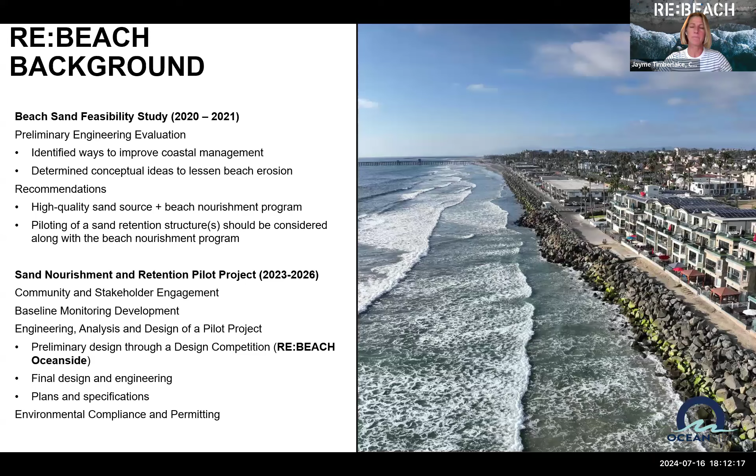Want to hit the next slide, Nick?

So last summer, as you may remember, Oceanside hosted the ReBeach Oceanside International Design Competition, which gave the city an opportunity to see what kinds of beach erosion solutions were already being tested in the world that we could borrow from other communities dealing with similar coastal stressors. The finalists included competitors from New York City, the Netherlands, and the Gold Coast of Australia.

The competitors were given parameters for the competition that were completely in line with the recommendations from the feasibility study. That was to design a sand retention feature that would restore and maintain sand along the coast while providing additional benefits to the community, and increase the efficiency and extend the benefits of any sand nourishment efforts that the city, region, or federal government may carry forward.

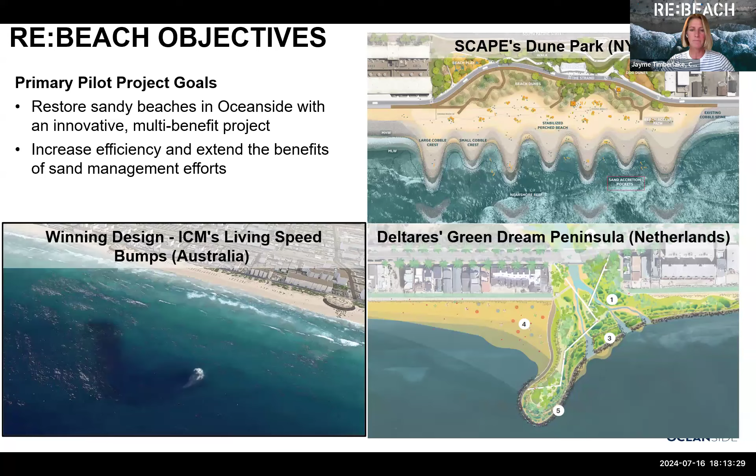We did a lot of public outreach for this, so we feel good heading into this next round. The competition finalists took part in 3 design rounds, each culminating with a presentation to the public at an in-person workshop. These rounds gave the public an opportunity to give feedback directly to the design competitors, and that feedback was incorporated into the final designs. All of these workshops were very well attended, with 150 to 220 people participating at each.

It's really important to recognize that you've been a part of this for a long time. We've been reaching out to you for a long time. Please continue to stay involved. Your involvement is really key to the success of this project, and I thank you very much.

There's also been a lot of regional interest. Given that interest and the potential effect of this implemented project at various scales, the project team has shared updates with regional stakeholders throughout the ReBeach process. Informational presentations have been given to city councils or designated commissions for all the cities to the south of us, including Carlsbad, Encinitas, Solana Beach, and Del Mar. Additional regional outreach has also been conducted at a myriad of local and regional stakeholder meetings and events, some of which are listed here.

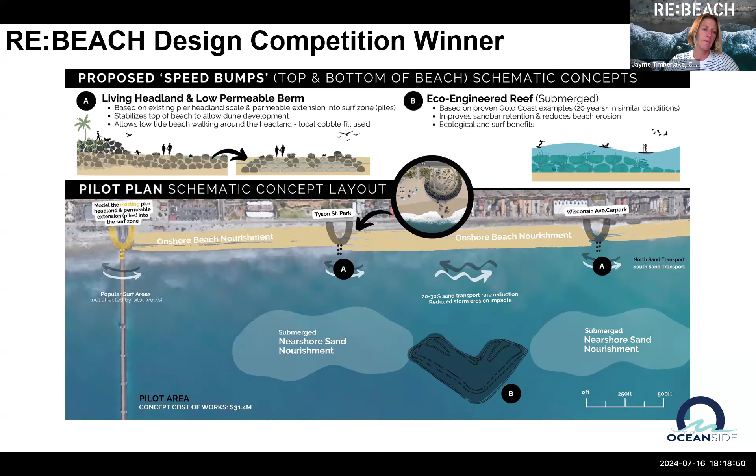Thanks, Jayme. Confirming that you guys can hear me okay. Good evening, everybody. My name is Nick Sadripour, senior coastal scientist with GHD, the consultants to the city and leading Rebeach. We're really excited to talk to you tonight about the siting analysis and orient you to how we're approaching the methodology and how we're looking at choosing a potential location for the pilot project.

For some of you who participated through the council workshop in January, you might remember we broke down the area, largely south of Oceanside Pier, into these 3 segments that were identified using natural breaks in the coastline, major roadways, natural coastal features, public access ways, along with the existing coastal management considerations. That's how we landed at these 3 segments.

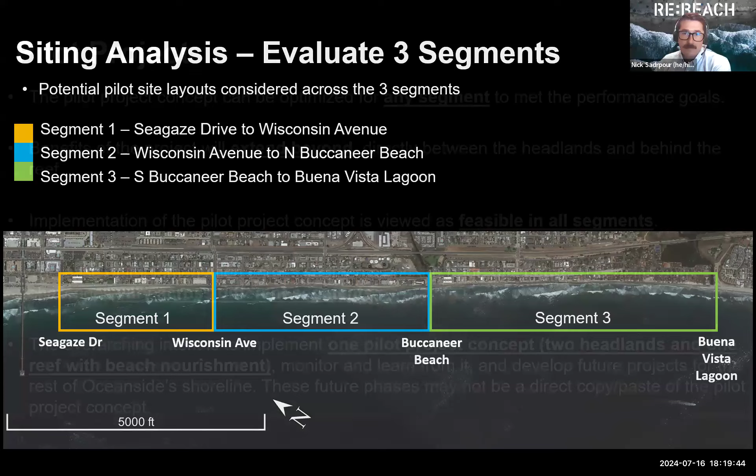Tonight, I'm going to walk through how we're viewing the pilot project concept in these segments. First, I'll go through the overall methodology and the criteria, then we'll pause for some Q&A, and then we'll go into the potential layouts in individual segments in more detail.

To orient you to some assumptions and how we're framing this siting analysis: we view that the pilot project concept can be optimized for any of the segments to meet the anticipated performance goals of the project. We also view that the benefits of the pilot project will extend beyond that specific location, meaning if a project is installed in one location, we anticipate the benefits to be much broader due to not only the stabilization we're hoping to provide, but also the beach nourishment component bringing new sand supply to this coastline and adjacent shorelines.

That being said, we view implementation of the pilot project concept as feasible in all the segments. However, the ease of implementation across the segments and the trade-offs between the benefits and challenges of implementation are going to vary across the different segments.

So overall tonight, our larger project goal and intent is to try to implement one pilot project concept, which is, as Jayme mentioned, the 2 headlands with 1 reef and beach nourishment, to monitor and learn from that pilot concept, develop future projects for the rest of Oceanside shoreline after we have this pilot project, and then understand its performance, what management's needed, and design additional strategies as needed.

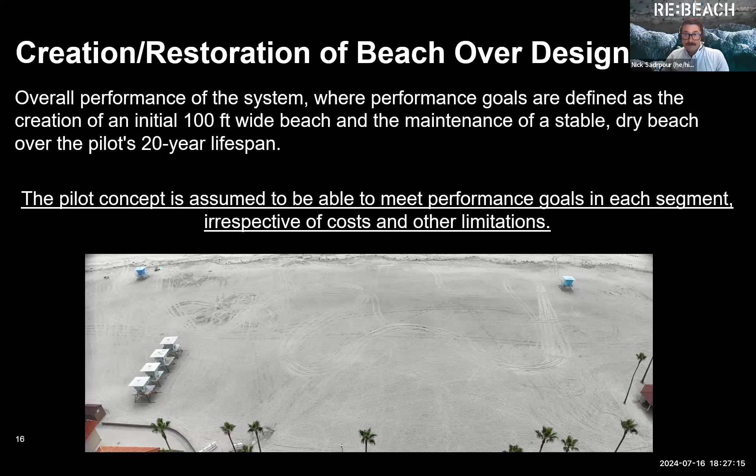The next criteria is sediment supply to adjacent beaches. This criteria assesses the anticipated long-term sediment supply response, an increase or decrease of the project outside of the immediate pilot project extent. Importantly, this includes beach nourishment management strategies.

We anticipate this strategy to result in an increase of sediment supply in the region because we're bringing a lot of new sand to the area, and that there's monitoring and management strategies established to mitigate any detrimental sediment supply effects. Similar to the other criteria, we assume this to be equal across the segments, meaning we can achieve the same level of positive benefit to the region regardless of the segment.

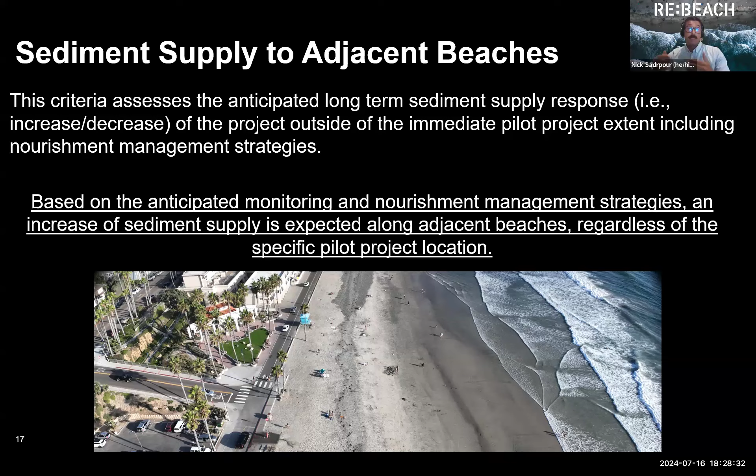Now, you might be asking why did we choose these criteria if we expect them to be equal? We felt that these two are some of the most important criteria when evaluating this project, the performance and the sediment supply, and that it's worthwhile to include them in this analysis even if we anticipate them being equal across potential locations.

All right, coastal access and amenities. This criteria looks at existing public features, access ways, parking lots, lifeguard facilities, parks, open space, restrooms, showers, things that provide additional amenity at that beach to a user group.

Given the diversity of amenities, some locations are better supported by certain amenities than other locations, and the location and type of public amenity can really help us think about how the pilot project location might be able to leverage those features in a particular location.

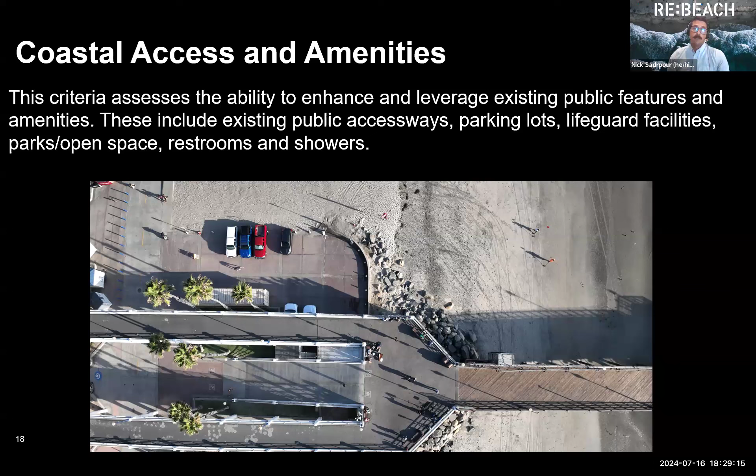The next criteria is property risk assessment. This criteria looks to account for risks and uncertainties associated with the pilot project. The uncertainty of effects is due to the experimental nature of the project. This is a pilot project, it's innovative, the first of its kind to get to this level in California in terms of project goals.

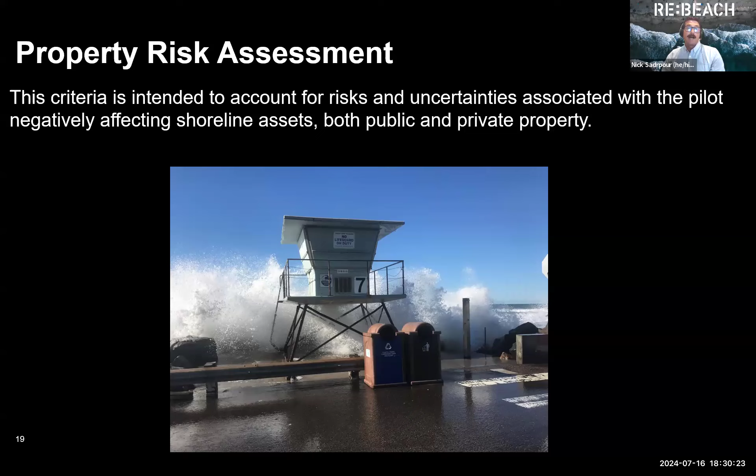The next criteria is private or public property entitlements. You might be asking, what's an entitlement? Generally, these are approvals, use approvals needed for implementing a development or project in an area. We're focusing this on the connectivity between the headland and the coast, that boundary between beach and water, and then on the land, particularly assessing where there's private versus public property boundaries and the uncertainties with how those connections could be managed in the long term.

Thinking through the example of a headland connection that has more private property adjacent to it, we anticipate a greater challenge in gaining right of entry permits for construction or future maintenance modification, as well as long-term access, thinking about potential agreements that would be made between the city and that private property on the shoreline.

On the other hand, where the headland is fully connected to city property, we foresee fewer obstacles and challenges in getting long-term access, construction permits, use permits, and long-term permissions and approvals, viewing this headland structure as something that's out there for two decades or more.

The next criteria we're looking at is constructability, the general feasibility of the initial construction of the pilot project, including the headlands and reef. We assume the reef is going to be similar across those areas, but the headland construction is not going to be equal at each of the segments.

We're looking at areas where there is land-based access for equipment, and certain areas that are more restrictive. This image is a good example of the recent Army Corps project in Encinitas, where it's a really tight bluff beach, and getting vehicles onto the beach in certain areas along that segment is more challenging than in other areas where you might have direct routes for a vehicle to get to. So we're looking at where you might need to install temporary haul routes for equipment or materials as you construct the headlands.

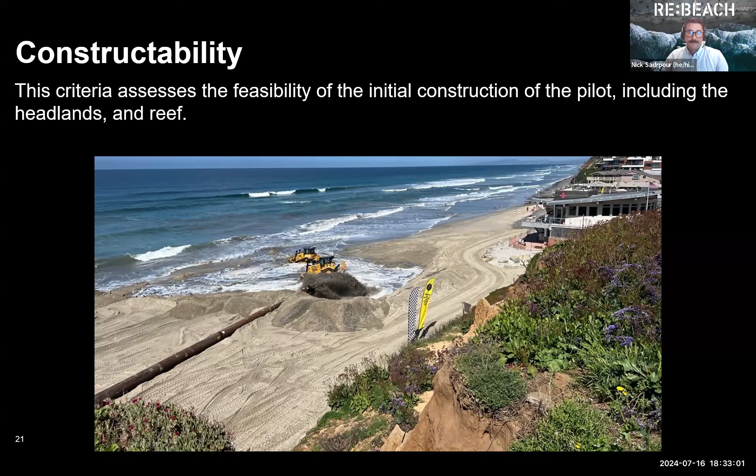A related criteria is the general cost of construction. We're looking at just the initial construction cost, thinking about the staging area for the work, its proximity to the actual project site, factoring in how we're going to get equipment from that staging area to the project site, and potentially additional material needed to connect those two areas.

We're looking at how certain layouts and initial construction constraints in certain areas might result in increased construction cost relative to other areas that might have much more easily, readily available connections for construction equipment and staging areas.

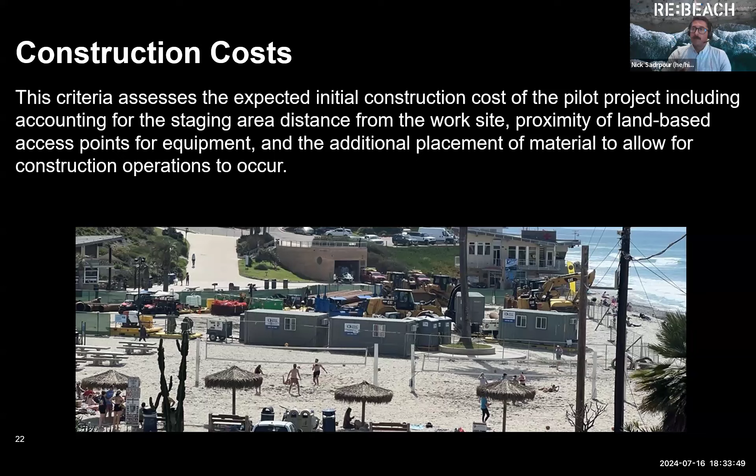Adaptive management is another criteria. This criteria looks at constraints primarily associated with having to go out and do routine maintenance or significant modification of the headlands, focused on that landward boundary again, thinking about access especially during severely eroded beach states, making sure there's ability for construction vehicles to get out there and provide the maintenance or modification needed for long-term adaptive management.

Again, we anticipate this to be easier and cheaper when it's adjacent to public property, and a little bit more complex and costly when it's adjacent to private property.

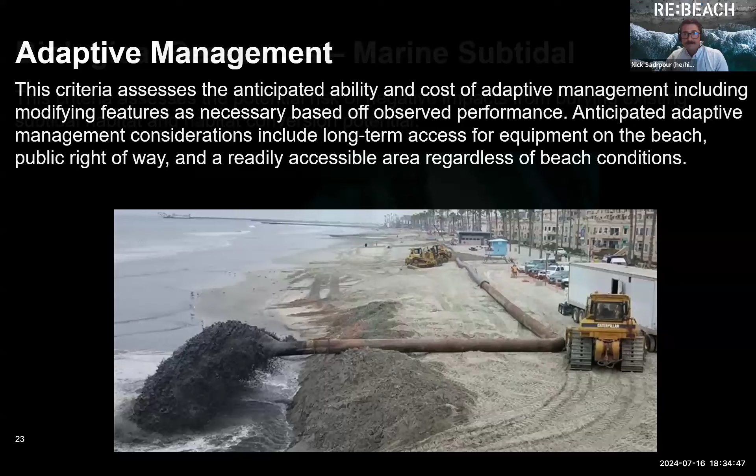Moving over to some environmental factors, we've split our biological resources into marine subtidal and marine intertidal. This criteria focuses on biological resources in the subtidal, below water, assessing potential risks of negative impacts from either direct burial or habitat conversion. Habitat conversion means shifting from, say, subtidal sandy habitat to a new artificial reef habitat, a rocky reef habitat. We're assuming some level of habitat conversion for the reef component, and where there's existing offshore biological resources, we'll have to take that into consideration when siting the reef location.

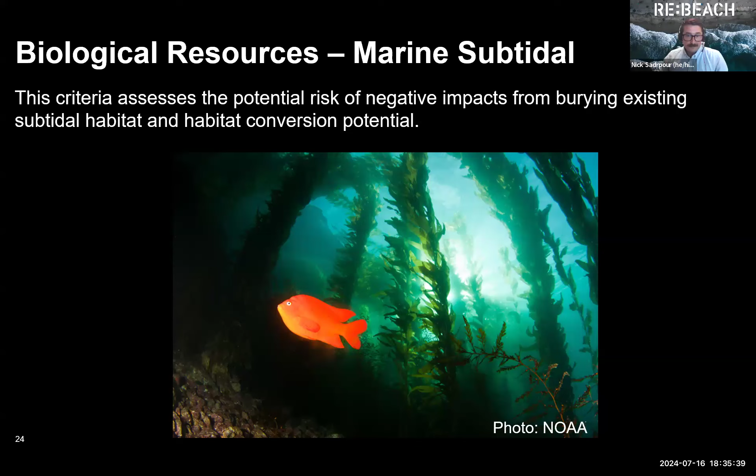Moving to the land a little bit, thinking about biological resources in the intertidal or the beach, this criteria looks at potential impacts to the back beach and intertidal components of the project. I have here some existing conditions along the Oceanside shoreline, the cobble, the revetment and riprap, and grunions that use and need that sandy beach area for reproductive development, trying to understand where there might be trade-offs or challenges for intertidal ecosystems depending on the location. That's what this criteria addresses.

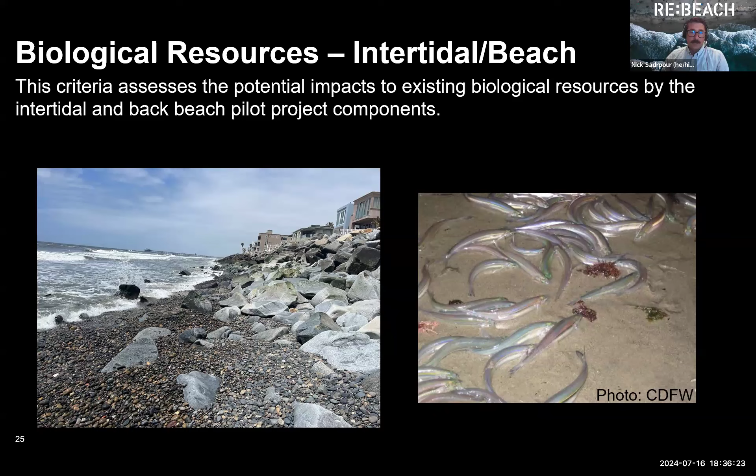Just a couple more, and then we'll take your questions. Surfing resources, something we've talked about a lot throughout this project - this looks at potential impacts to existing resources. A segment with potentially higher surf quality and higher number of users represents an area with potential for a greater amount of negative change, so a place with high quality resources now would get a low score for this category. Whereas a segment with low surf quality or low number of users would represent an area with greater potential for neutral or positive change and receive a higher score for this criteria.

And finally, public and marine safety, which has come up a lot for this project. This criteria looks at potential alterations to lifeguard services and operations, and how to maintain that existing level of marine safety, looking at how we can leverage vehicle access points as well as the existing lifeguard headquarters and lifeguard towers stationed across the shoreline.

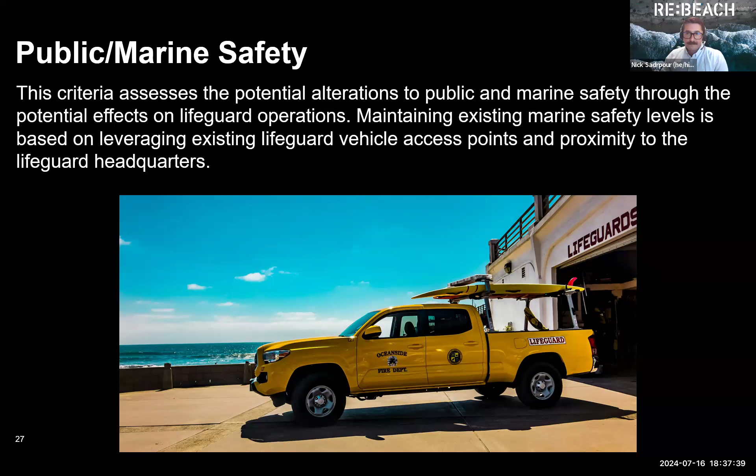So I know that was a lot. Again, we hope to use this criteria to evaluate as best as possible the main parameters that will influence the ease of implementation and logistical considerations of constructing the pilot. We'll take some questions in just a moment - just flagging that the next set of slides will go into more detail about each segment and potential layouts, but we're hoping to address questions about methodology, overall approach, and criteria now.

So I think Sam's going to be our facilitator for the Q&A. I know there's already a few in there.

Yeah, thanks Nick so much for walking through that. Just to reiterate, what we want to make sure is that everyone understands what the criteria are, what they mean, why they're in the list for the multi-criteria analysis, and what we're going to be doing with the MCA. We've been answering a bunch of questions through the Q&A text box - note that there's already 4 questions that have been answered, but there's a few open questions we wanted to take live.

I'm going to start with 2 questions from Matt McDaniel that are related, looking for clarity on 2 of the criteria - coastal access and amenities, and private public entitlements. I'll ask them as a single question: Coastal access and amenities is an MCA criteria - isn't that circular reasoning because the project itself would provide coastal access and encourage building of amenities? We've actually talked about this a lot as a project team, so I'm glad you asked, Matt. And second, regarding public-private entitlements, isn't that the same? How can you use the criteria for site selection if that's precisely the intent of the project itself? I think there's a bit of a definitional thing there, Nick, but I wondered if you could speak to those 2 questions. Let's start with coastal access and amenities.

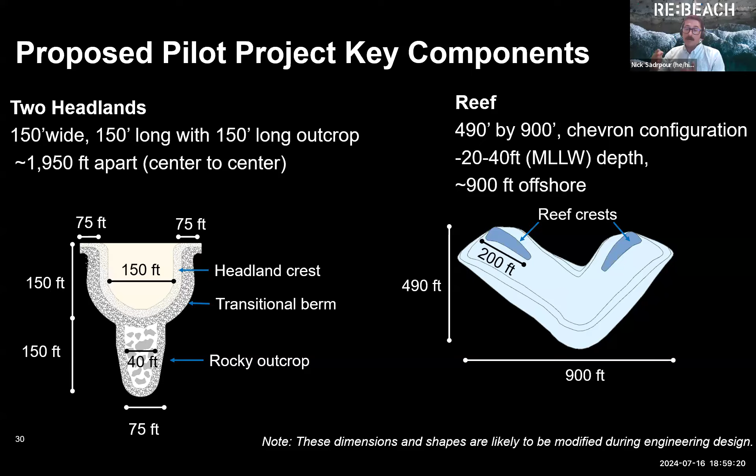As noted at the beginning, we are taking ICM's design as submitted through the design competition. You can see them laid out here, inclusive of all the buffer materials proposed within the headland—thinking about the transitional berm and the rocky outcrop that extends from that feature—and on the reef side, the original concept and associated dimensions. As we move through engineering design, numerical modeling, and likely physical modeling, we anticipate these will be modified and optimized for the particular location we select.

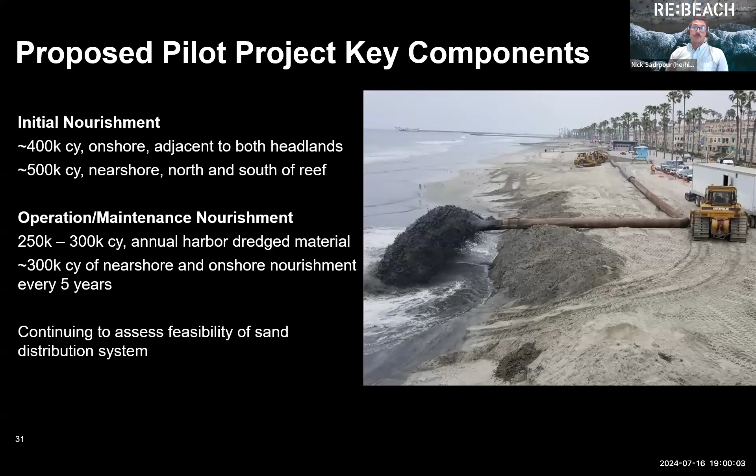On the nourishment side, as Jayme mentioned, there's nourishment onshore and in the near shore as part of initial construction. We're also looking at operational or maintenance nourishment, either from annual harbor dredging or through a re-nourishment activity—potentially an Army Corps effort if that pans out, or a separate nourishment activity. We're continuing to assess the feasibility of a sand distribution system to maximize the efficiency and persistence of sand, giving the city another tool to manage the coastline.

Looking at segment one, we recognize that it's entirely this public street with a lot of pedestrian access. There's a lot of formal coastal accessways and other amenities, restrooms, showers, parking lots. The public road, the strand, is along that shoreline, and it's approximately 90% public property.

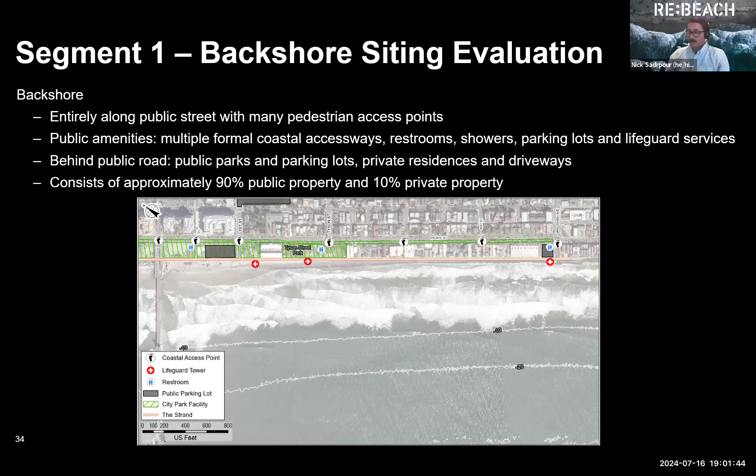Looking at the on-the-ground situation, this segment on the northern end has the most dry sand cobble that persists along this project area. That's on the left side of the screen - the more northern area of the segment, closer to almost Tyson Street Park. On the right, further south in the segment, is where the beach really starts to narrow, and we start merging, even at low tide, the water with the cobble and riprap and revetments mixed.

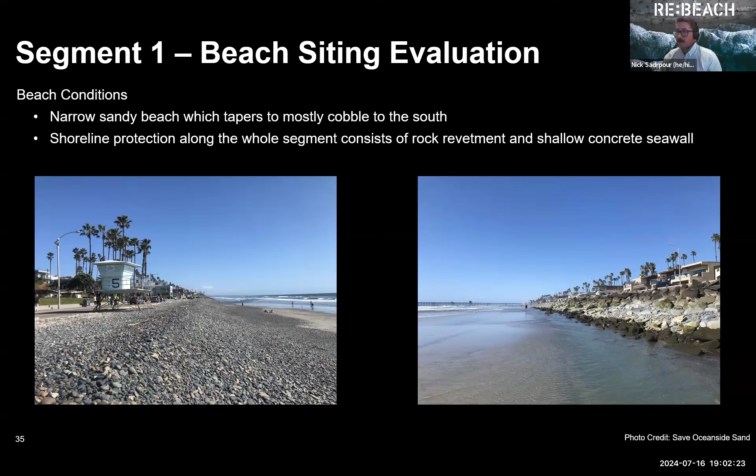I appreciate Save Oceanside Sand for sending us some photos to really help us understand the conditions out there.

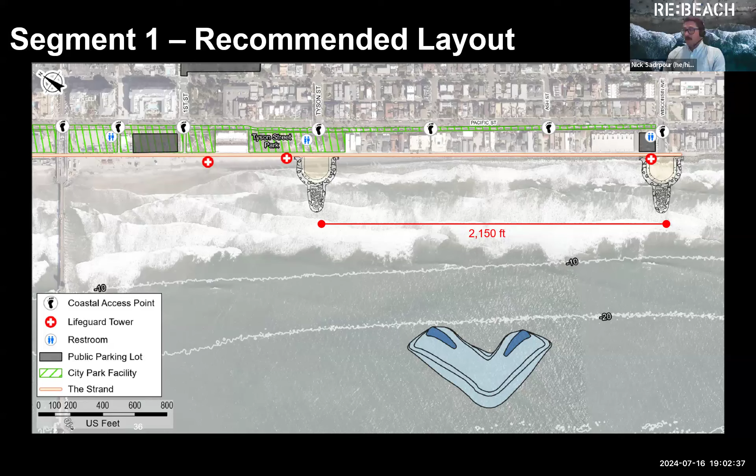In segment 1, our recommended layout ended up at Tyson Street and Wisconsin Avenue, and I'll walk through how we got to that. The recommended layout at Tyson Street and Wisconsin Avenue is really fully supported by all the existing shoreline amenities - lifeguard towers, restrooms, parking lots, park space, and formalized access ways. I'll show you in just a moment the runner-up potential layout.

There's equal considerations for headland connectivity and property boundary, but the southern end of that segment avoids potential impacts with existing sandy beach habitat and surf resources focused around the pier. Another way to say that is we're hoping to remove the project from those existing resources to limit any potential impacts in those areas, both surfing and sandy beach habitat.

The considered layout for segment 1 was at Seagaze and Ash, on the northern end of this segment. Again, that footprint starts to encroach on the dry beach area, which could potentially cause more impacts to habitat, as well as surf resources closer to the pier that are more consistent because of that pier structure and feature, as well as recognizing that Ash Street isn't as high quality of a coastal access point, specifically compared to Wisconsin Avenue, where you have the major roadway, the parking lot, lifeguards, and restrooms.

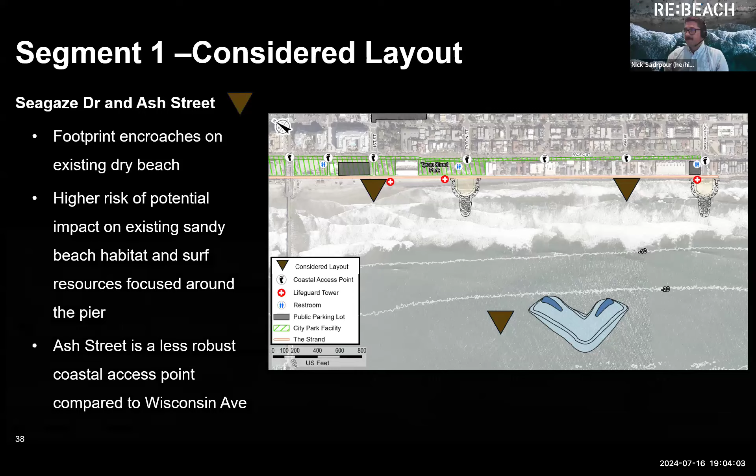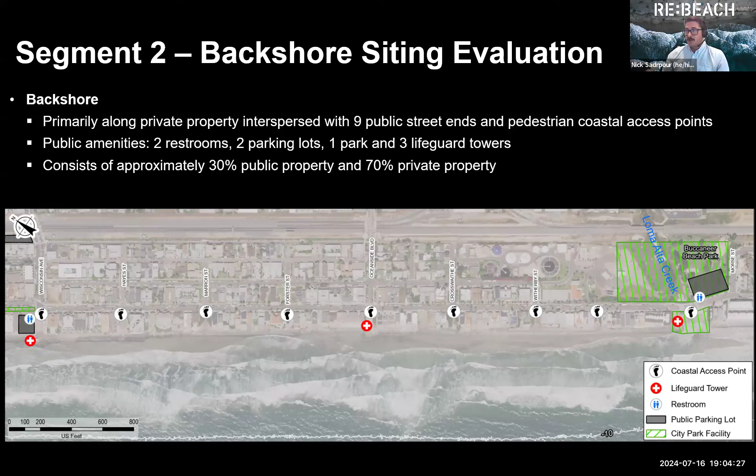Moving down the coast and looking at segment 2, again there's a number of coastal access points symbolized by those footprints. We have lifeguard towers, some restrooms at Wisconsin and Buccaneer, parking at Wisconsin and Buccaneer, and I believe it's called Lot 26, up closer to the rail corridor. This shoreline approximately has 30% public property with about 70% private property.

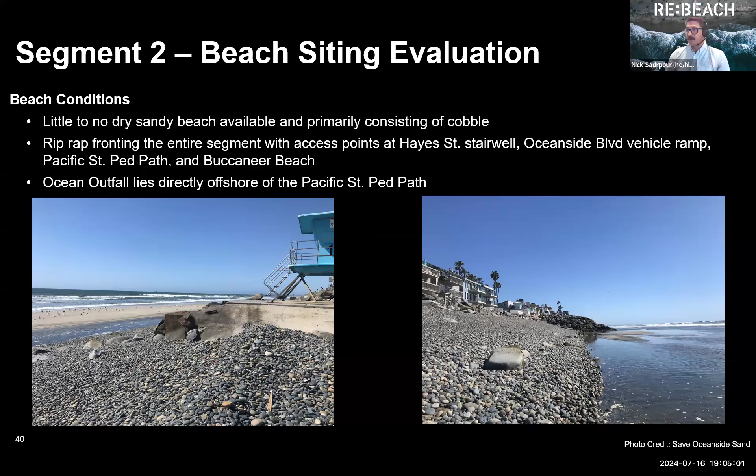Looking at the beach, this is typical conditions, where there's really not a lot of dry sandy beach area. There is some persistent cobble berm that integrates into the revetments, with riprap lining most of the area. There are coastal access points at Hayes, and the Oceanside Boulevard vehicle ramp presents an opportunity. We'll also note there's an ocean outfall from the La Salina wastewater plant directly offshore, what we've called the Pacific Street Ped Path, but essentially this easement here, if you can see my cursor.

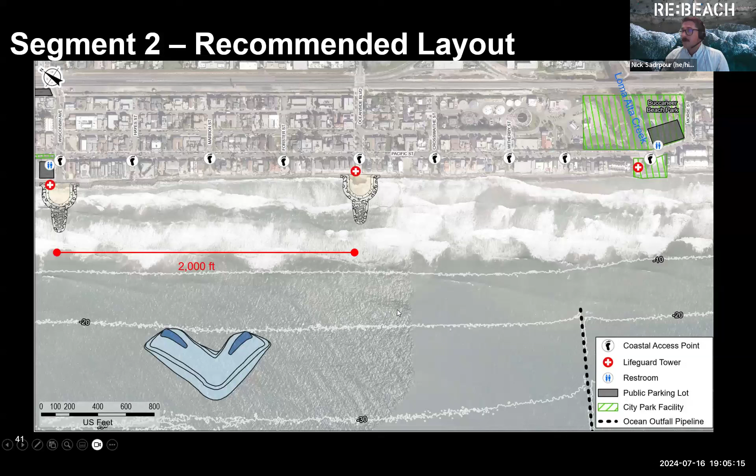So the recommended layout for segment 2 is Wisconsin Avenue and Oceanside Boulevard, and I'll walk through this rationale for that location.

That layout really looks at all the existing shoreline amenities and how it's getting supported by the existing lifeguards and those coastal access ways. It also has more connectivity to public property, in particular, the strand, thinking of a more connective beach area across that entire part of the segment. It also has slightly more public property, which lowers that potential risk on private property.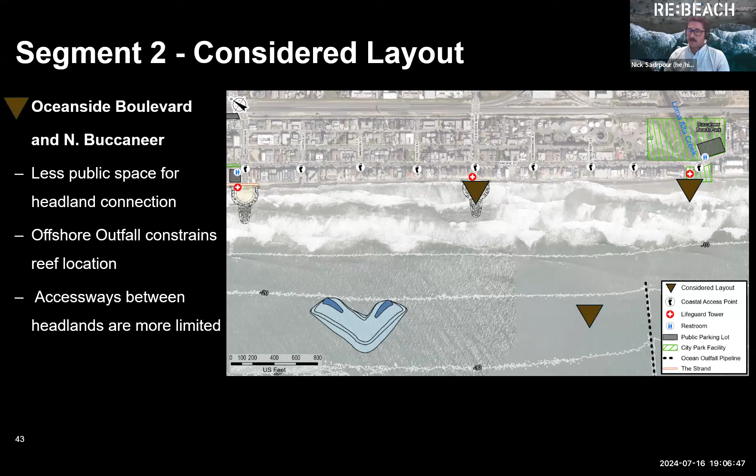Moving along the coast to segment 3, there are four public pedestrian coastal access points in this area. We have the amenities at Buccaneer Beach, and this section of coastline has the most amount of private property compared to public property.

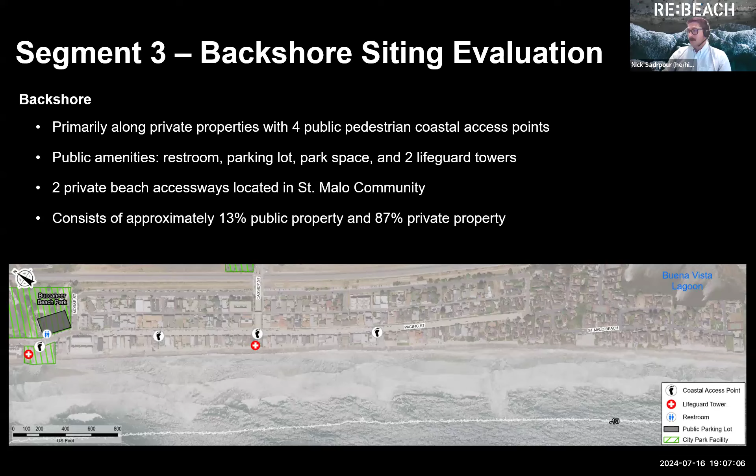As we look at the shoreline, it's similar to segment 2 in the lack of dry usable beach area and the eroded condition of that very narrow band of cobble and some sand right against those revetments.

So the recommended layout for segment 3, we landed at South Buccaneer Beach and Cassidy Street, prioritizing those two coastal access amenities and features — the lifeguards, the parking lot, restrooms at Buccaneer — and incorporating that into the pilot project.

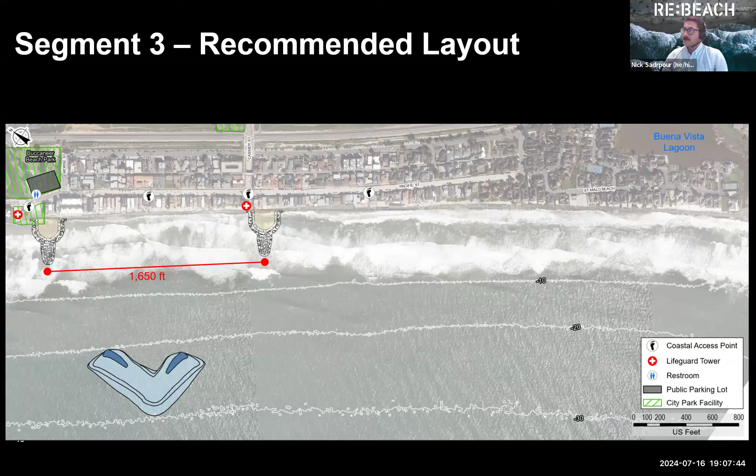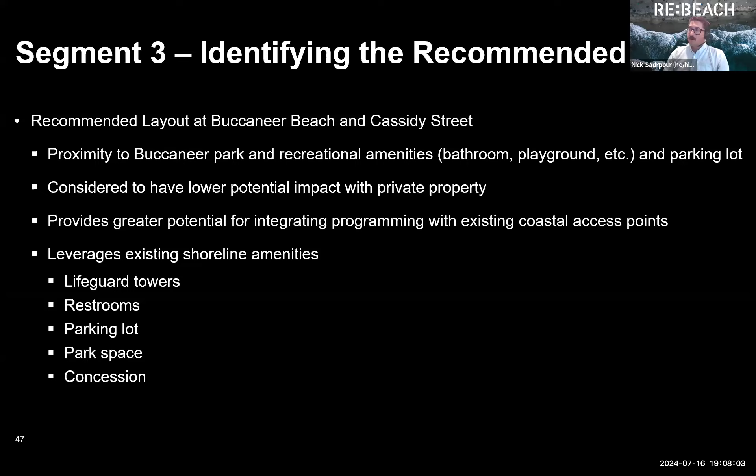That northern layout for this segment really maximizes those existing shoreline amenities. It allows for a little bit more programming opportunity — meaning the available space of that headland — considering how narrow those bands are of public property along that shoreline.

In thinking of potential impacts to private property or views of private properties, when we looked at this alternative layout at the Whaley Street pedestrian area and that other easement pedestrian path at the very southern end, these were not as high quality as the leveraged coastal amenities present in that northern alignment at South Buccaneer and Cassidy Street.

So throwing these all together on a map, we landed at these recommended layouts per segment: segment 1 is Tyson and Wisconsin, segment 2 is Wisconsin Ave and Oceanside Boulevard, and segment 3 is South Buccaneer and Cassidy Street.

So I'm going to kick it over to Jayme real quick to talk about some next steps before we move to questions and answers.

Thanks, Nick, for all of that. I see more questions coming in, so this is great — I really appreciate everyone giving us feedback like this and allowing us to answer some questions, because we are in it, we are in the thick of it. The public outreach for all of this really has just begun.

We expect to continue this type of outreach. We're going to do one more webinar like this, and then some pop-up events throughout the summer, so this isn't your last chance to give feedback. We'll also provide a survey available on rebeach.org after this webinar, plus one-on-one opportunities throughout the summer, likely pop-ups at the farmers markets, maybe the night market, surfing events, and other public events at the pier.

Great, thanks, really appreciate that. I'm wondering, Nick, if you can jump back to slide 48, which has this — I think this is a helpful slide. I meant, sorry, 49. Oh, it's different in this. I know you made a slight edit. Okay, in mine it's 48.

I want to start with one question that came in, and in the first cluster of questions, I want to focus on the different segments and what it means to have these recommended layouts, and make sure everyone understands how this feeds into the decision process that Jayme just talked through and how we'll be doing the analysis. But the first question is from Anonymous.

Seems like the offshore chevrons would require the least amount of public-private conflict or negotiation. Why not adapt the pilot and implement additional chevrons outside the headlands and groins, not just inside? Maybe either Jayme or Nick could take this.

I might ask this person to submit a clarification. The pilot concept that won the design competition, selected by the city council to move forward, is the two headlands with the one reef and beach nourishment that we've been showing. I'm trying to understand if this means foregoing any headlands in exchange for a hyper nearshore reef abutment of some kind. Not trying to put words in this person's mouth, but we're charged and tasked with trying to move this concept forward, and that's essentially why we've done the analysis this way.

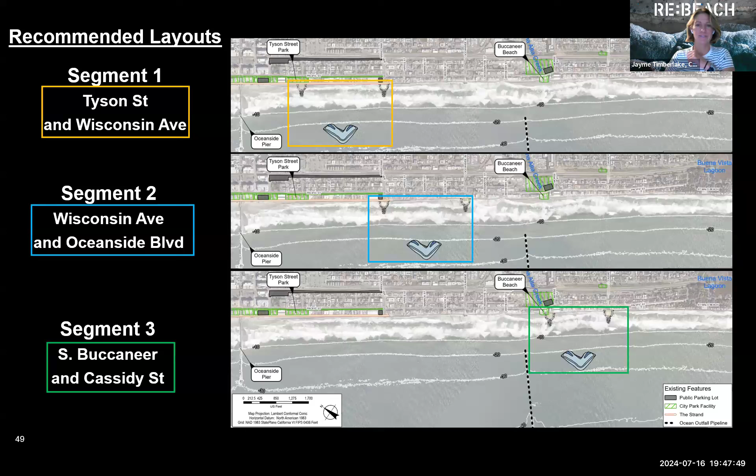Great, thanks. There's one more question that just came in, but I think we'll type an answer to that because it's a good question—there's a straightforward response to that. But let's move to start closing up.

Maybe go to the next step slide just to restate some of those things. I just wanted to say thanks to everyone who has been part of this conversation today. If there's folks in your community, your neighbors, family members who couldn't make it tonight, make sure they know about the Thursday webinar, 3 to 5. You can register right on the Rebeach website. There's a link to the Zoom, and there's also more information on the city's website as well.

If they can't make it this week, we're going to record it and put it on the website, hopefully by the end of the week, or certainly by early next week. So you can forward the link to the YouTube so people can watch this and get all the information. For all the questions being asked, we're going to be synthesizing and compiling this and updating our frequently asked questions page on the Rebeach website. So we're trying to build up a resource that makes it easy for people to understand where we are in the process, what's going on, what questions we're answering right now. And we want to continue to get feedback through fora like this.